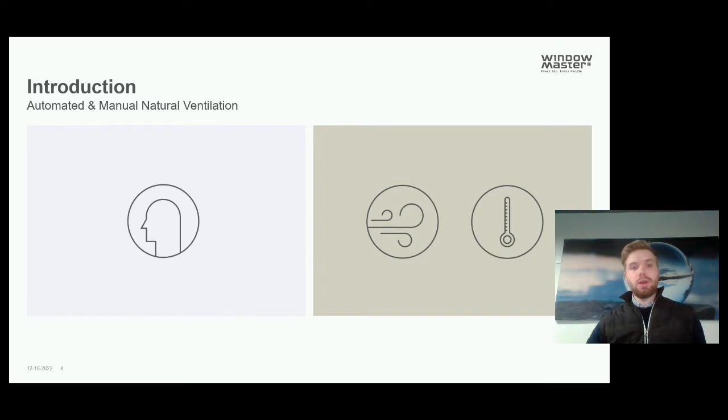I'm looking forward to talking about manual and automated windows in relation to natural ventilation. First off, I want to have a brief talk about the term natural ventilation, because it is something that we really see gets more attractive in green, sustainable, low energy buildings. However, the term natural ventilation is really covering a lot of different levels of system design. So everything from simply having manual operable windows to a more automated, integrated system within the building.

And these levels of designs make a big difference, and it is really depending on, of course, the use of the building, the need of the occupants, but also what the ambition and goal is from the designer's point of view. So is it to have these operable windows be an integrated part of the ventilation, or is it more a thermal comfort feature to provide the occupants with some personal control, more similar to ceiling fans, for example? You could maybe even call this natural conditioning. And this is really the origin of this webinar, I think, to discuss these different levels of design.

And Mia and I would actually like to start off with a quick poll. So I will already give the word back to Mia. All right, guys, I've got a poll for you here. So the first poll has to do with what drives or has driven you to include natural ventilation design in your project. Please give us your answer. I should have posted the poll now. Please start providing some answers. I've got a few different options for you on the screen. Please write to me if you cannot see it popping up.

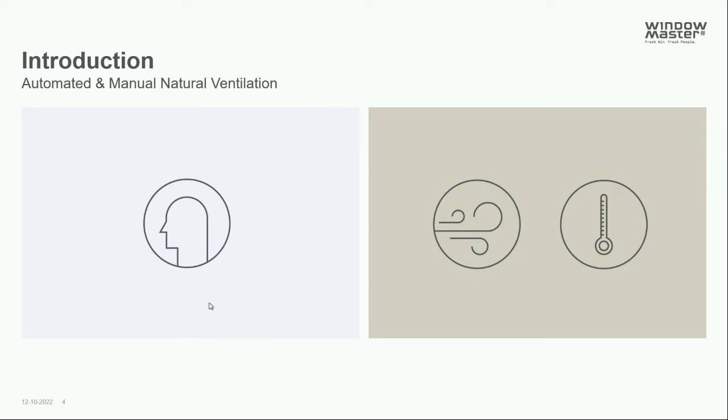And just remember, that can be in a manual sense, that can be in an automated sense. However the design is, what we are talking about today is just in general using natural ventilation. What has driven you to include that, or right now if you're potentially working on a project. So please submit your answers. I see you guys are working on it. Appreciate your interaction. I'll just give it another 10 seconds and then I'll close it up and show you what the answers are looking like. All right, I'm going to go ahead and close that poll for now, and let's take a look at what our answers were.

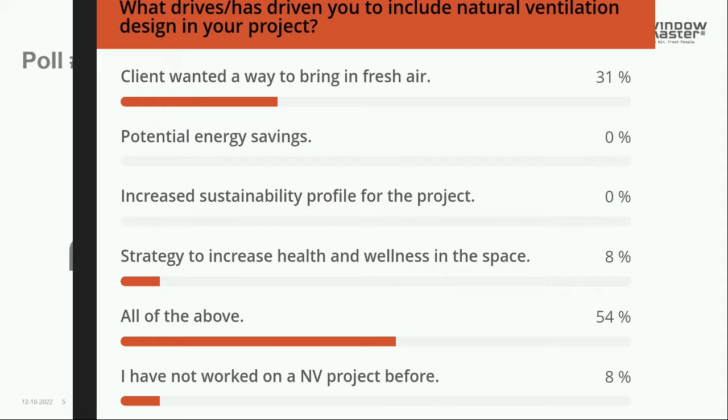All right, so most of you said actually it was all of the above. Second to that was the client wanted a way to bring in some fresh air. Nobody said anything about energy savings, nothing about the sustainability profile of the project. Some had also given feedback that it was maybe discussed as an increase in health and wellness, or again, all of them combined is the highest feedback that we have. And then a few of you have never worked on a natural ventilation project. Fantastic. Thank you for showing up today and learning about this topic. Maybe it'll come in a future project for you. So interesting, Casper. Let's bring that with us for the rest of the webinar. It's a little mix of everything. Yeah, looks good.

So with that said, let's take a brief look at the agenda today. To begin with, we want to look at some of the benefits and pitfalls of operable windows. Then we will address a quick study about occupant behavior in relation to manually operable windows. Then we will take a look at some system design and how automated control differs from manually operable windows in relation to hardware, sequences of operation, and different ventilation strategies. Then we will have a case study showing point 3. And finally, we will have a brief talk about some of the general struggles that designers experience when trying to implement operable windows in energy modeling software.

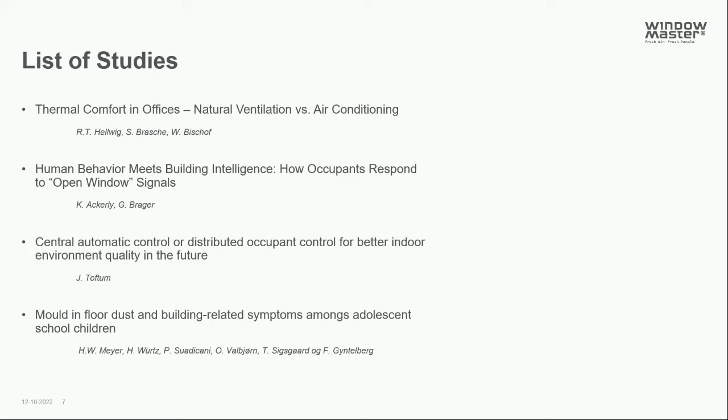Now, one of the greatest benefits of operable windows in general is this level of personal control that you provide the occupants that you can't have in the same way with manual ventilation or mechanical ventilation. Different studies show that there is a clear connection between naturally ventilated buildings with operable windows and the level of personal control experienced.

Now, this is something that we know really increases user satisfaction, but it's also something we have seen will allow the occupants to accept a wider range of temperatures, which is something that allows us to be more ambitious with our design and maybe even use something like the adaptive comfort model, which really is where personal control is a requirement.

Now, when we introduce automation into the building, it's of course important to make sure that the systems don't interfere negatively with this personal control. And there's not really any perfect answer for this, but there are different things you can do to prevent this interference. For example, it's important to balance, when you have an automated system, when the system will regain control after a manual input, because if this is too fast, then the user can feel that the building is counteracting their input.

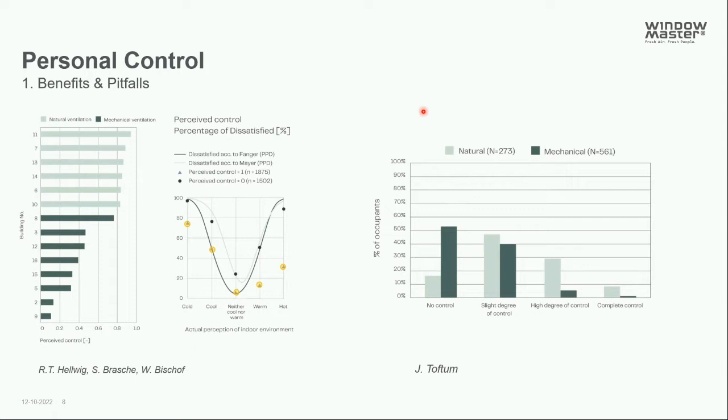You can also make a more practical solution where you have separate windows, for example, for automated control and manual control. And I will show an example of this later.

Now, one of the greatest both benefits and pitfalls, you can say, with operable windows is this correct window position in relation to having the correct airflow, bringing in the sufficient amount of air, but without causing any problems inside the building. With more simple automated sequences and with manual control, we tend to be very cautious in relation to the outdoor temperature in which the system will operate within.

However, we know that in modern buildings, for example, passive houses, there is often a cooling demand even at lower outdoor temperatures because of the air tightness and the insulation level and all the heat produced inside the building. So in order to really take advantage of the free cooling potential and ventilation potential, it requires us to have a good control of the window position, which is very hard to achieve with manual windows and can be achieved with automation if the sequences are sufficient. This I will also talk about a bit later.

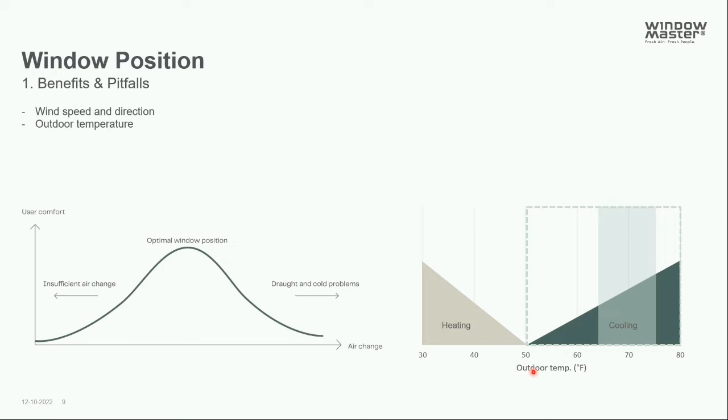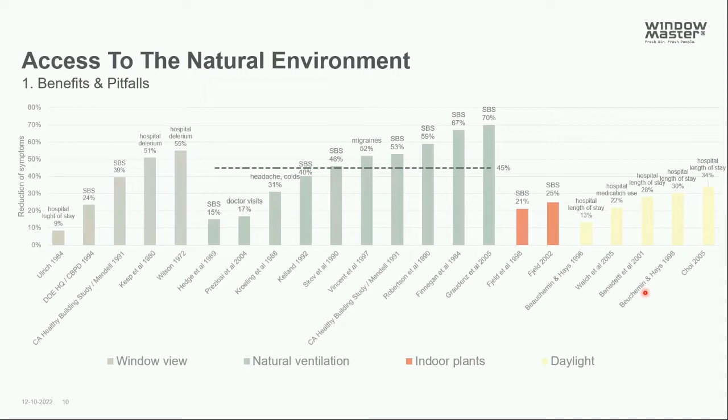Now, studies have also shown that there is a great benefit of having access to the natural environment within the built environment. This is not limited to natural ventilation, but also in relation to daylighting, of course, and window view, which is why we always suggest that buildings are designed with the focus of bringing the occupants closer to the outer perimeter of the building.

If we look more specifically at natural ventilation, the studies show that we can reduce the occurrence of sick building syndromes inside the built environment. And this term is covering all of the common negative effects that you can experience inside the built environment, such as headaches and different kinds of irritation and concentration problems. There are many different studies on this topic. The ones I have on this slide show an approximate reduction of this syndrome of 45%.

And it's important to mention that these syndromes are something that really needs to be prevented and not reacted to, because as you know, once you have a headache and once you feel tired, it's very hard to fix that. So it needs to be handled before the occupants experience this. And this is where we often need more sensitive equipment, such as CO2 sensors, for example, to help us with this. And it is very beneficial to have it in connection with an automated system and not rely on occupant control to prevent bad air quality.

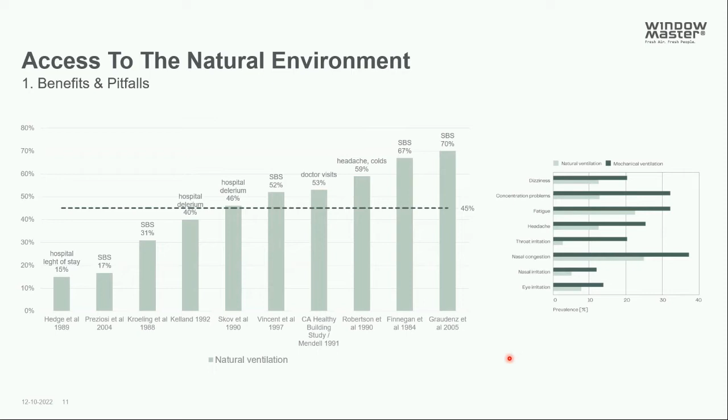Last thing I want to mention in relation to the pitfalls is the noise production by having automated windows, which in the past has been a big concern, and it is really a result of outdated and bad hardware. With modern hardware in buildings, we always suggest that the actuators controlling the windows have at least 3 different operation speeds, and this is because the operation speed is directly related to the noise production.

And later on, I will show an example of how many times the windows can actually operate throughout a day to emphasize the importance of this. On the other side of the spectrum, you have the need for a faster operation speed in, you can say, emergency mode. This could be something like rain, where you aren't necessarily concerned about the noise produced, but you want the windows to close very quickly.

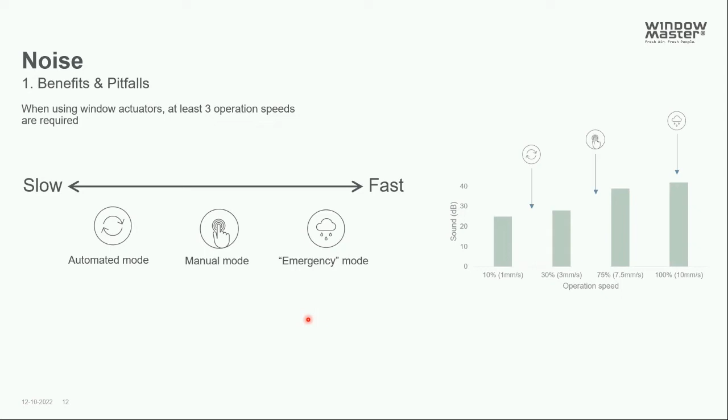This brings us to the next poll that we want to present. So I will give the word back to Mia again. Casper, also before we go to that, Vanessa had a question: are these speeds dependent on the style of window? So dependent on the window configuration, I guess a hopper versus awning versus casement versus parallel pop-outs, inward but also versus outward projecting. Are those speeds dependent on the style of the window?

I would say the general answer would be no. In general, in automated mode, you want the windows to operate pretty slowly to not produce any noise. And it's not really important whether they open very quickly or not. You can say maybe with skylights that are far out of reach, where the occupants can't hear them, they can maybe operate faster, but general answer, no. Yeah, so no matter if it's a hopper or casement or an awning, inward, outward, or projecting, in a general sense, the style of the window shouldn't have an impact.

Vanessa, it's important that you connect with your actuator provider and talk to them about the decibel levels of the various speeds of the actuator that you're looking to use in a project. Most actuator providers will show, or at least can give some indication of, what the decibel levels of their actuators are, and if they also have the capability to do varying speeds depending on how the actuator is used, as Casper said, automated mode, manual mode, or emergency mode. So it's an important conversation to have to make sure the kind of actuator you're specifying will work with the project that you're working on.

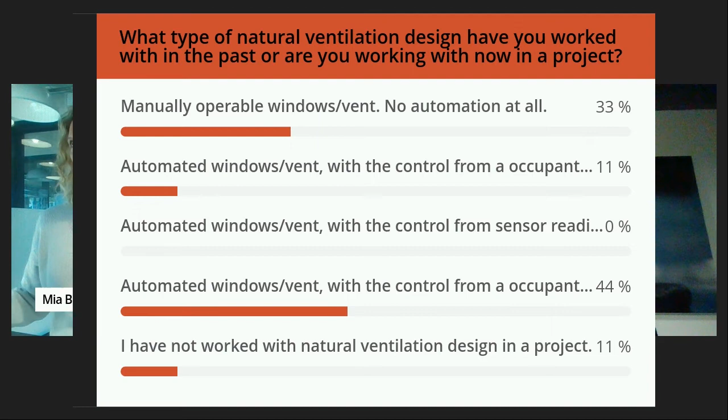Yes, thank you. So now I want to present a quick study on occupant behavior in relation to these manual windows. This was performed by UC Berkeley in California, and the study was based on 16 different buildings throughout the US, most of them on the West Coast. It was also based on occupant surveys and featured a signal application telling the occupants when to open and close the windows.

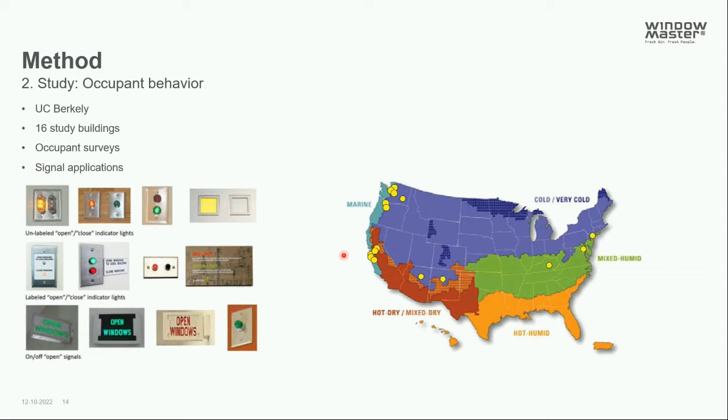The first results from this study I want to look at is the response to the open and close signal. Here the participants had the option of answering always, usually, sometimes, never, or not aware in response to whether they responded to the open signal. Initially, we can see that the results vary a lot. There is no direct connection between the number of occupants within the building and the response.

The best three cases you can see here in terms of response were also the buildings where the occupants received the most training or education on the system, and where they were actually actively reminded to use the system. We can see that in the three best cases here, the number of occupants that frequently responded to the signal, which means they answered usually or always, was about 50%. And in the other cases, this number was only about 20% approximately, where the majority answered that they sometimes responded or never or not aware.

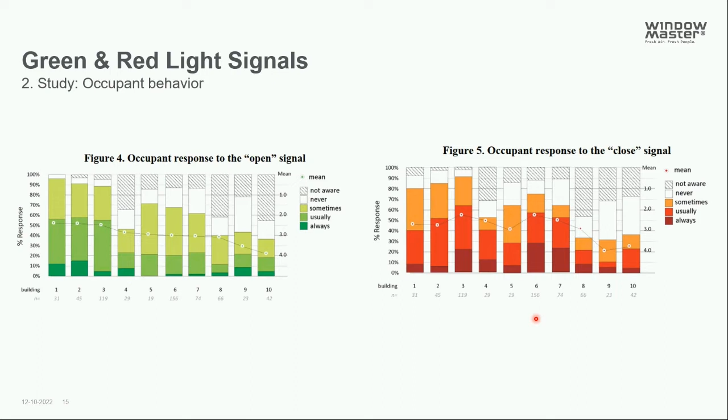The next result from this study was where the occupants were asked their motivation for opening the windows, so whether they want to be cooler or get fresh air, and their willingness to follow the signals, or if they were more inclined to follow their own preferences. And what we can see here is that the results also vary a lot between the extremes. In the case of the willingness to follow the signal, there was actually a large connection between the number of occupants and the willingness. And this is probably a result of an open office environment where the occupants feel more responsible in terms of the indoor environment towards their fellow occupants.

The motivation behind opening the windows was mainly based on thermal comfort or to get fresh air. And the fresh air answer is pretty interesting because behavioral models when it comes to operable window control are mainly based on temperatures, because these are easier to predict in terms of occupant behavior. As we talked about before, humans don't have the greatest ability to sense bad indoor environment or bad air quality.

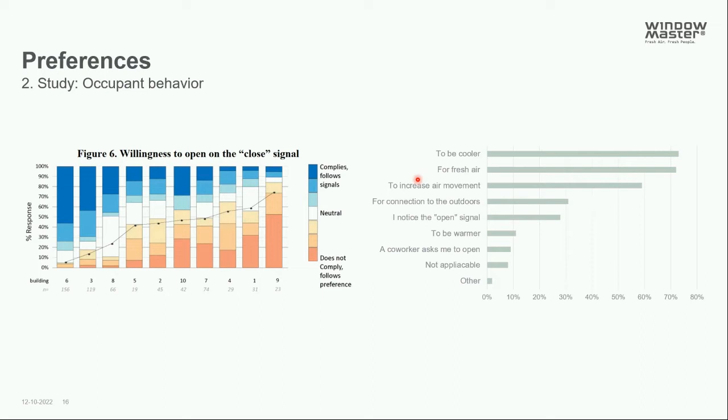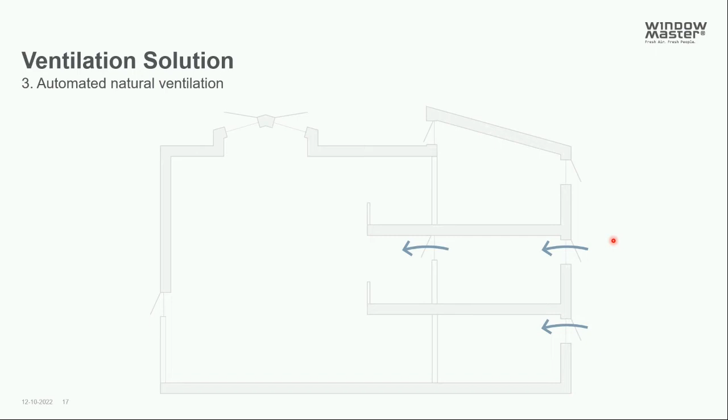With that said, let's take a look at a ventilation solution and how an automated system really diverges from manually operable windows in terms of the hardware needed. Of course, with both options, we need openings toward the outside to bring air in, but we also need to prioritize indoor vents if there are connected spaces where we need cross ventilation, for example, an office connected to an atrium.

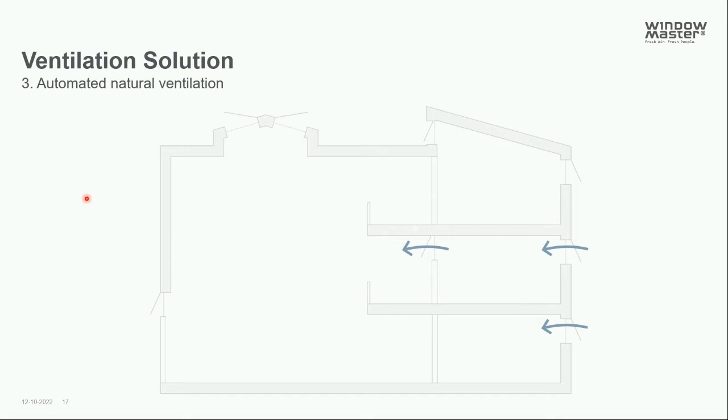These operable windows can be operated by actuators, which can be connected to a central motor controller. And this is, of course, necessary in an automated system, but it is also often used for manual control. If, for example, the windows are too heavy to be operated, if they are not in reach of the occupants, or if you want more efficiency in terms of opening and closing multiple windows at the same time, this can also be beneficial for the building operator in terms of the security of the building.

Now, with automated control, the motor controllers can also receive input from sensors, of course, inside the ventilated spaces and use this to operate the windows. In an automated system, the motor controller can also be connected to a BMS, a building management system, to gain further input from, for example, a weather station, and this can provide outdoor temperature and outdoor wind conditions such as wind speed and wind direction.

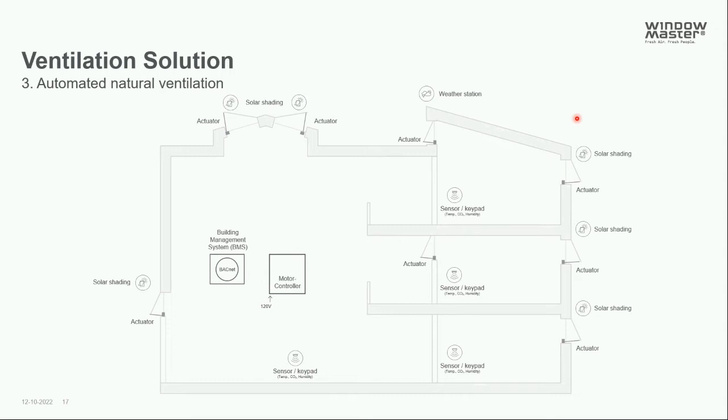Solar shading is not directly a part of a natural ventilation system, but it is still very important to consider, making sure that when the windows open, they don't interfere with the solar shading, but also to make sure that when the solar shading is activated, you can still provide fresh air into the occupied spaces.

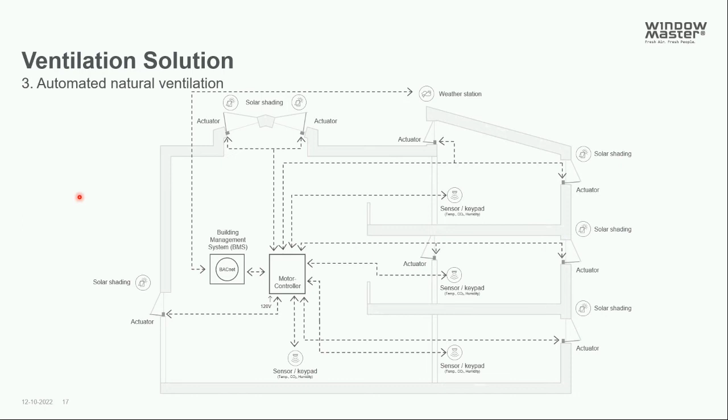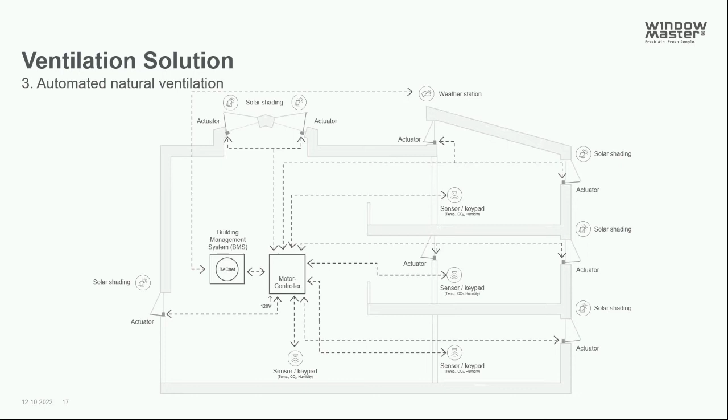When we look at hardware needed for an automated system, it is really not that much more than for a manual option, especially if you already have the actuators and the motor controllers for the manual system. Where the automated system really differs from the manual option is when we start to look at the operation sequences. And this is where we can become more ambitious with the system if we are able to control the window position more accurately, as we talked about in the beginning of the webinar in terms of the outdoor temperature.

This will, of course, require some more input from the engineers and shift a lot of the responsibility on the engineers, whereas for a manual operable system, the risk and the responsibility is moved more on the occupants because they are responsible for opening and closing the windows based on the indoor environment.

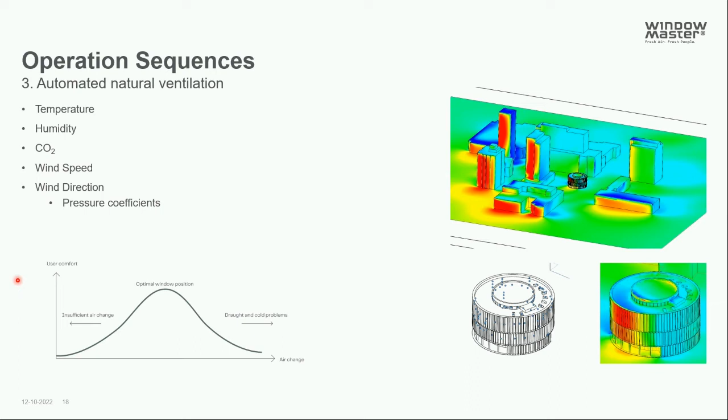But if we want to be more ambitious with when we can use the system, it is worth taking more responsibility of the system and including different factors such as temperature, CO2, and so on in the window operation, and especially wind speed and the wind conditions are important when trying to figure out the right window position in terms of the airflow in the building. So it's important to know whether the windows are sheltered or exposed to the wind.

On top of these sequences, we also have different ventilation strategies that we can use in an automated system. For example, pulse ventilation, which is a great benefit for colder conditions, or to provide a more dynamic indoor environment for the occupants. Because here we don't supply a steady airflow to the occupied zone, but we use the windows to provide a more dynamic airflow into the occupied space.

Then we also have trickle ventilation, which is again about finding the correct window position in relation to the necessary airflow based on the indoor environment, so we don't just open the windows randomly. The last strategy is night cooling, which is where you reduce the temperature inside the built environment during the night to cool down the building mass and other materials inside the building. And this is not limited to natural ventilation.

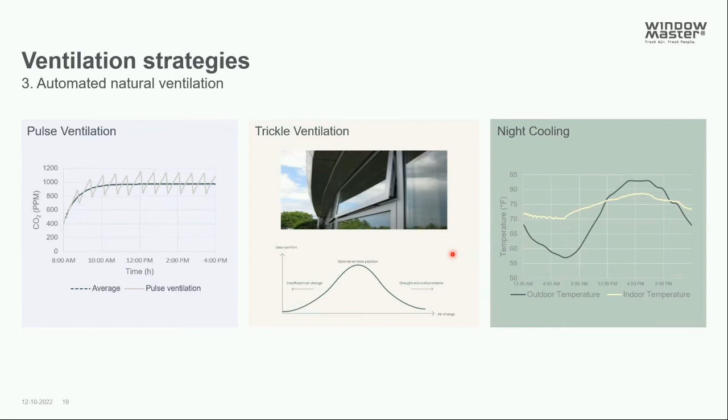However, it is a great benefit with operable windows, because not only is the airflow free of any energy consumption, but you can also often have a really effective night cooling compared to a mechanical system where the maximum capacity is primarily based on the daily demand from the indoor environment and cannot necessarily be exceeded. Whereas with operable windows, you can often achieve a much higher airflow during the night because there is a greater temperature difference between the inside and the outside. So you have more passive driving forces and can really achieve a very effective night cooling.

A quick case study showing these strategies. Here we have an example with small high-level windows for automated control. We have larger windows which are purely manually controlled. This was what I talked about, personal control, in the beginning, that these windows are not being interfered with by the system.

The design here is based on cross ventilation, so you have the same setup on the other side, and you have a very heavy building mass with exposed concrete, which is optimal for night cooling. The system is controlled based on the factors that we talked about and the strategies presented before.

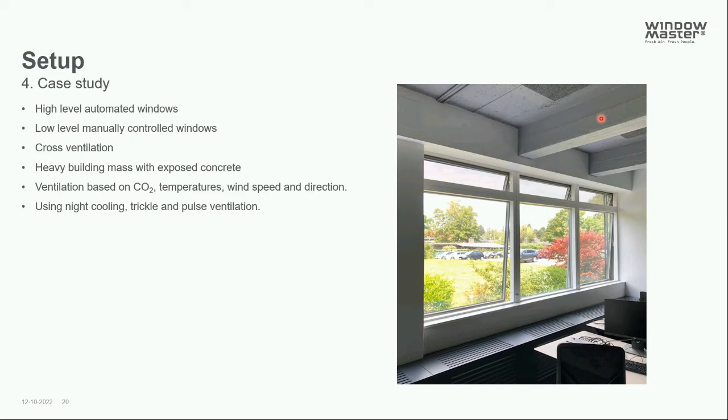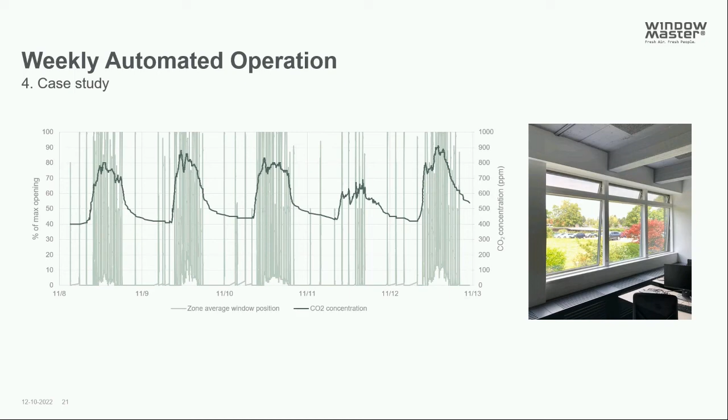These two strategies combined will then maintain the CO2 level the rest of the day until the occupants leave the office. And as you can imagine, this kind of strategy here is not really feasible with manual control. Otherwise, you would almost have to hire a person purely to operate the windows.

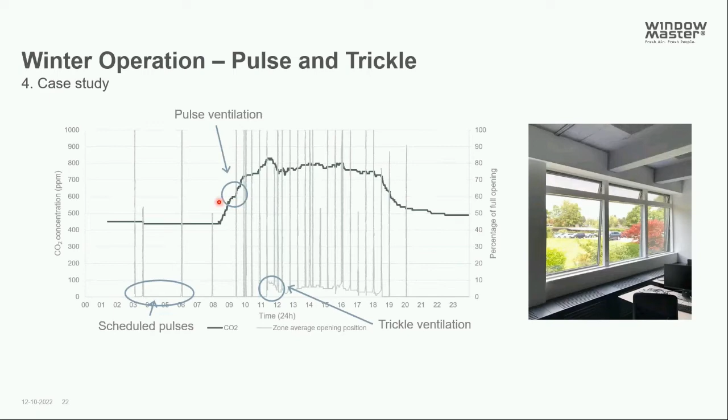This also, of course, requires that we don't supply an excessive amount of fresh or hot air, as the outdoor temperature is much higher than the indoor temperature. And this is why we can use some of the strategies from the winter time, so pulse and trickle ventilation again, to only supply the necessary amount of air to regulate the air quality.

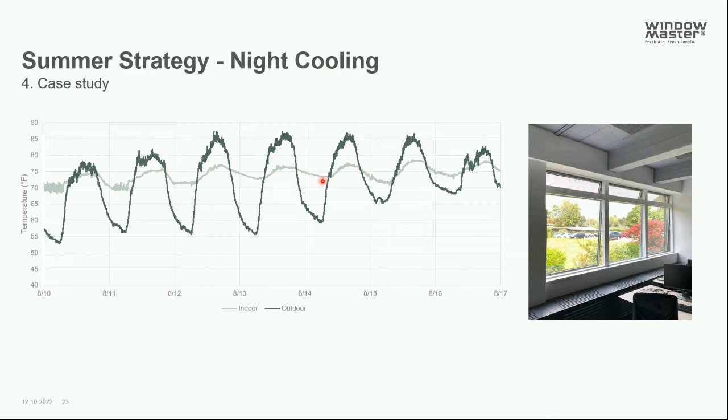This is a case here, House Zero. I just wanted to show another case. This is a project on Harvard campus in Boston, where they take some of these strategies to an even more advanced extent and use natural ventilation throughout the entire year. And to do so, they have 4 different operation modes based on the season, the outdoor temperature, and humidity levels.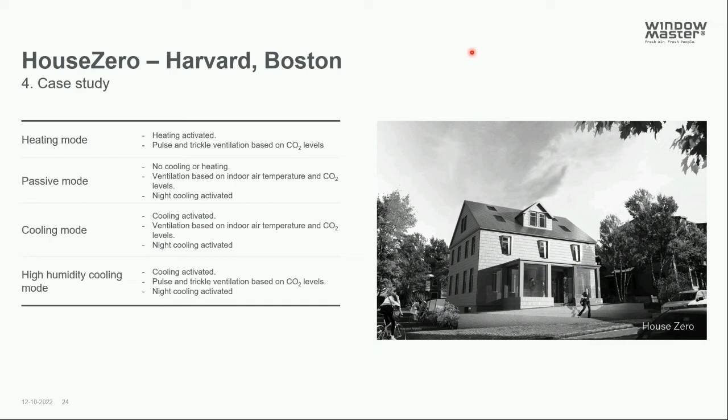Yes. So I can see we're a little bit tight on time now, so I will be quick on the last slide here. This is just a brief talk about some of the struggles when implementing these operable windows in energy modeling. And it's going to be very high level because it's an entire webinar topic in itself. But we see that the use of natural ventilation is really driven in many cases by low energy design. So there is really a demand for having good models for energy modeling purposes.

And with automated control, of course, you can treat it as a mechanical system. It's easier to predict how much we can use the system throughout the year. I have an example here. For example, for Boston, in a building based on certain criteria and so on, to investigate the amount of hours where you can use the natural ventilation throughout the year.

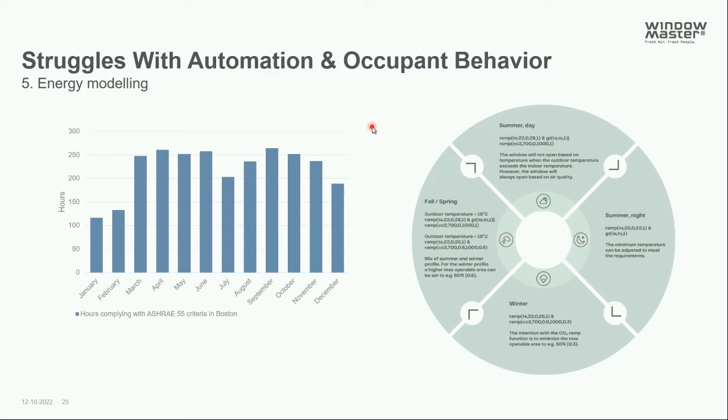Before we hop over to the Q&A, I just want to spend 1 minute on a remaining topic here. It is the system that WindowMaster has to provide. It's a system called NV Embedded. Casper talked a lot about the controllability of actually using some of the systems and control sequences available throughout the year and the seasonal changes, such as winter mode, summer mode, night cooling, pulse and trickle ventilation. That sounds very sophisticated, and it requires that as an engineering team you have the capabilities to create the intelligent natural ventilation control sequences.